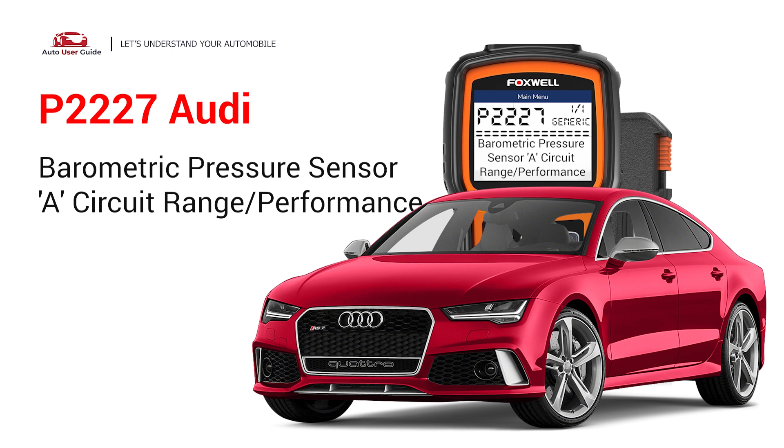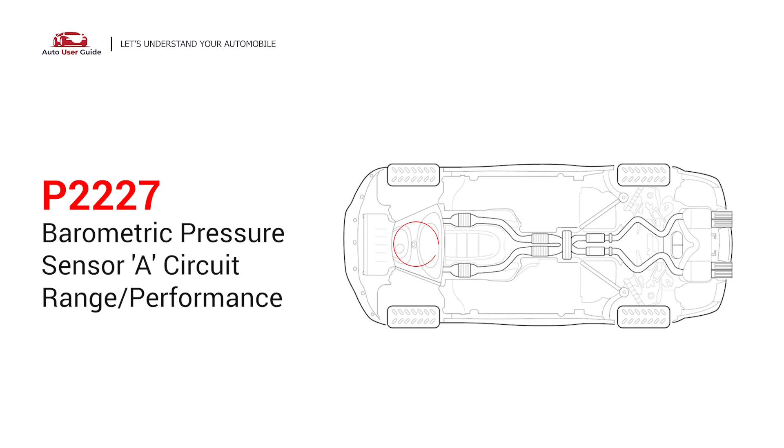This repair video for the P2227 error code is specifically tailored for Audi drivers. If your Audi is showing a P2227 code, this is for you. This means that the engine control module, ECM, has detected an incorrect or unreliable reading from the barometric pressure sensor A or its circuits. Under this circumstance, stop driving and repair your vehicle immediately.

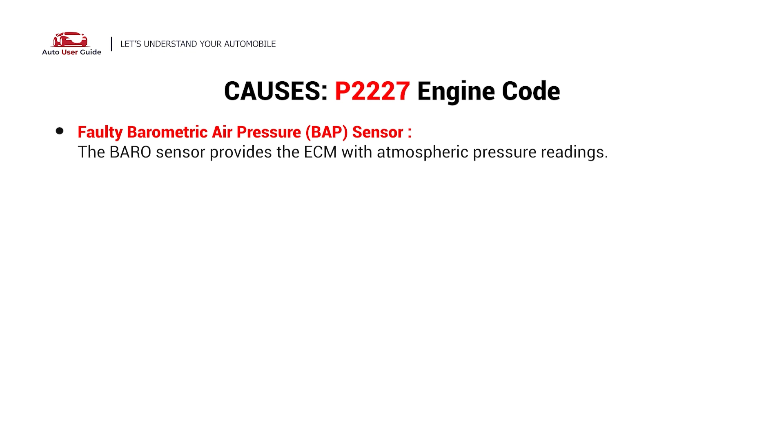So, what causes this imbalance? Here are the most common culprits. This error could be caused by these 10 possible faults in your car. A faulty barometric air pressure sensor. A faulty mass airflow, MAF sensor. A faulty engine control module, ECM. A short or open condition in the Baro sensor circuit.

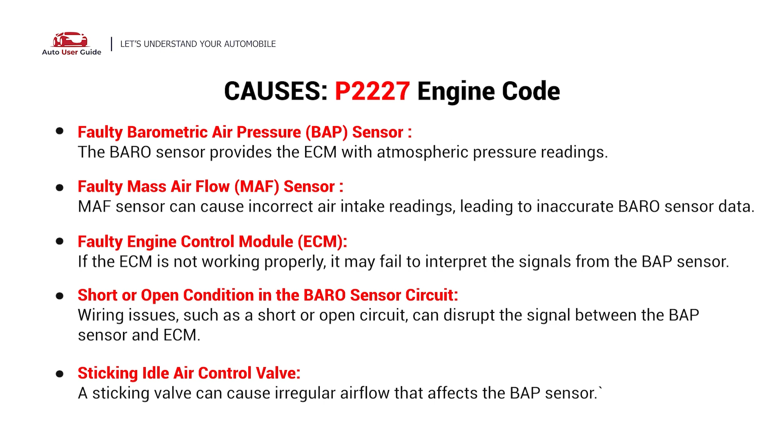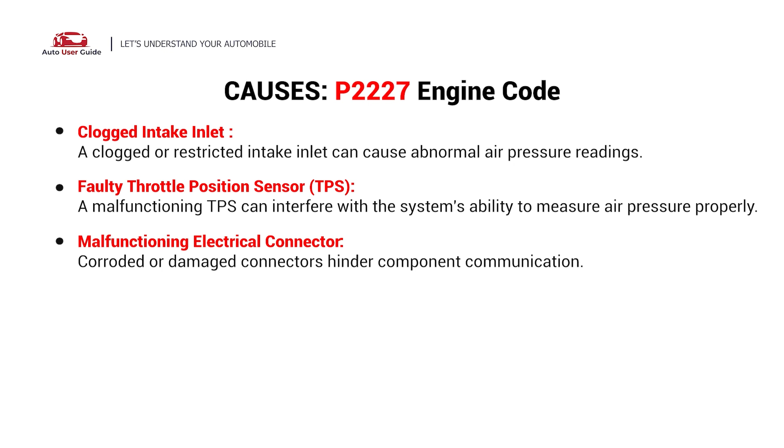A sticking idle air control valve. A clogged intake inlet. A faulty throttle position sensor, TPS. A malfunctioning electrical connector. Inoperative wiring. Heat damage.

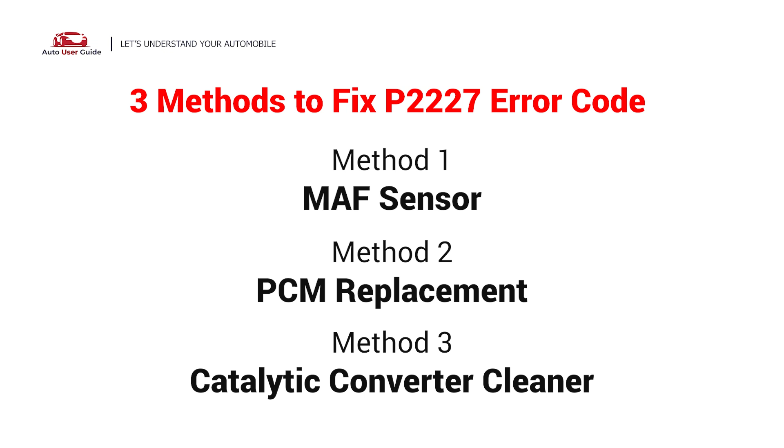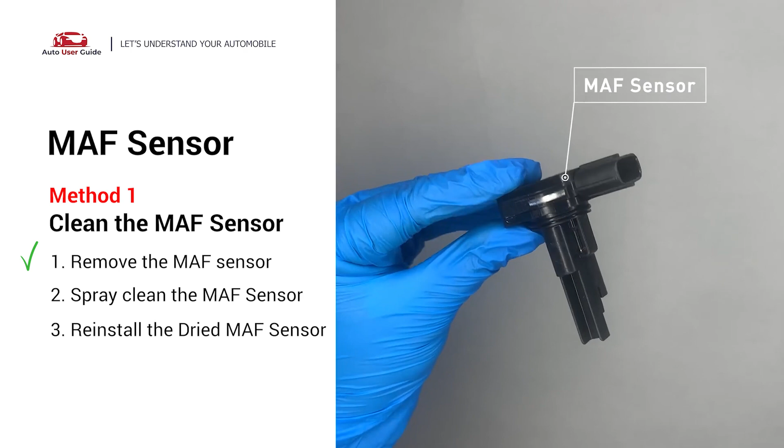Here are 3 simple DIY methods you can try to solve this problem. MAF sensor. Carefully remove the MAF sensor from your car and do a quick inspection around the wire. Inside often gets dirty and needs to be cleaned. You can spray the MAF sensor cleaner onto the wire parallel to the ground so that it won't damage the MAF sensor. Reinstall the MAF sensor back in the car after it gets dry.

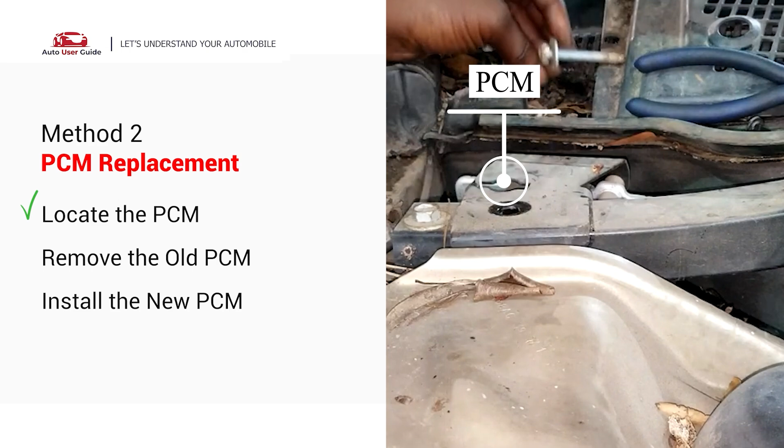PCM replacement. The PCM is usually located in the engine bay, under the dash or near the firewall, usually mounted with bolts or clips and connected to a wiring harness. Unplug the wiring harness carefully. There may be clips or levers on the connector. Remove any bolts or brackets holding the PCM in place.

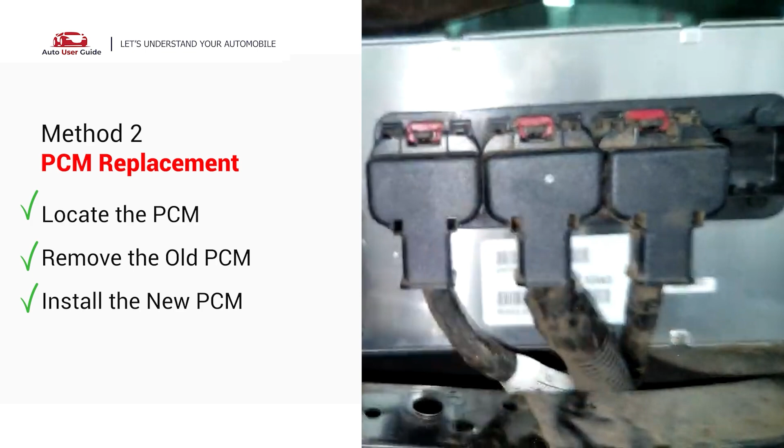Take out the old PCM. Install the new PCM in the reverse order. Plug in the wiring harness securely. Secure it with bolts or brackets.

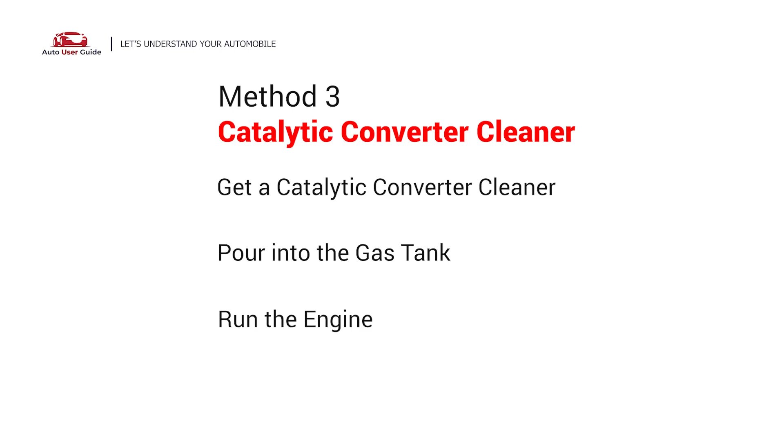Method 3. Use a catalytic converter cleaner. Use a cleaner of your choice. Simply pour the cleaner into the gas tank. Then, you can drive at least 150 miles.

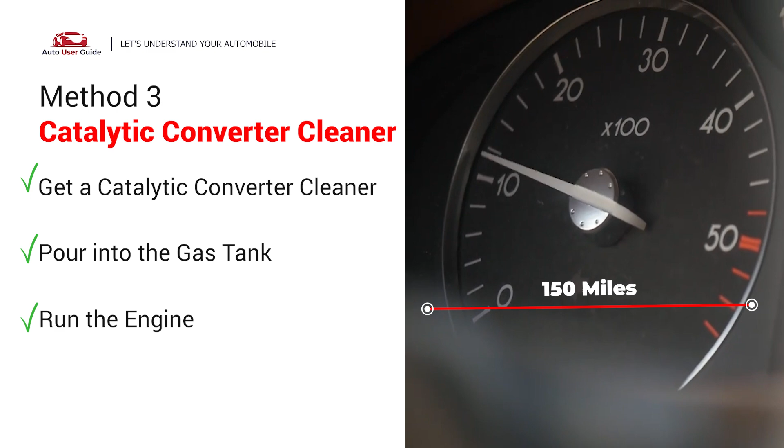This code can appear in various vehicle models across multiple manufacturers, including Ford, Volkswagen, Audi, Chevy, Mazda, Acura, BMW, Isuzu, GMC, etc.